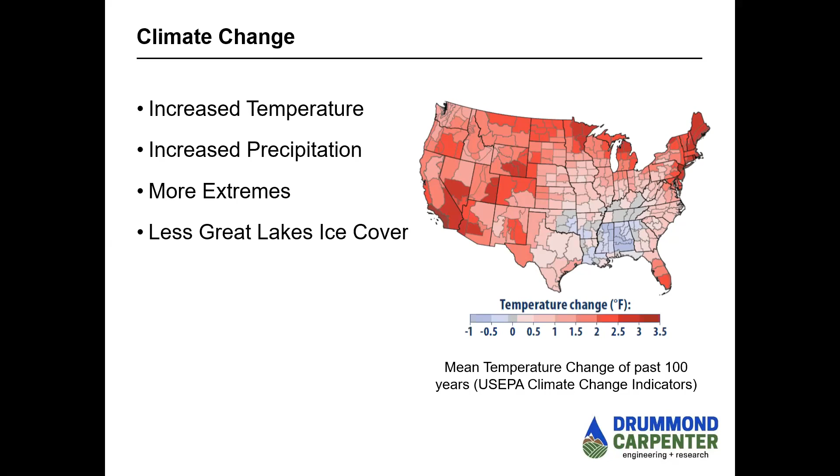We've definitely seen an increase in precipitation, and many of you experienced that - we'll get to that on the next slide. But in addition to the overall increase in temperature and precipitation, what's more important, or as important, are the extremes: longer periods of drought, longer, more extreme weather events. So it's not just the averages, it's the extremes that are affecting us. Overall, we're actually seeing less Great Lakes ice cover, and that has various influences on our microclimates in the state of Michigan.

So what about increased precipitation that's been observed? Basically, over the last 100 years we've seen the average annual precipitation go up about 16%, almost 5 inches. But this isn't distributed evenly - what's really happened is our falls have gotten quite a bit wetter. You're seeing a 24% increase in fall precipitation when you look at the 4 seasons. And remember we talked about more extremes - the 4 wettest days of the year have increased by 35%, a third greater. So our wet days are wetter than they used to be in the past 100 years.

So that's observed, that's statistics. But you also have people looking at predictions, different climate models, asking what's going to happen to precipitation in the future. If you look at mid-century, roughly around 2050, there are low carbon emission scenarios and high carbon emission scenarios - these are averages based on a whole bunch of different computer climatic models. Basically what they're saying is that by mid-century you're going to see about an additional 10% increase in rainfall in the next 20 years or so. By closer to the end of the century, it's going to be anywhere from 15 to 20%, depending upon emission models.

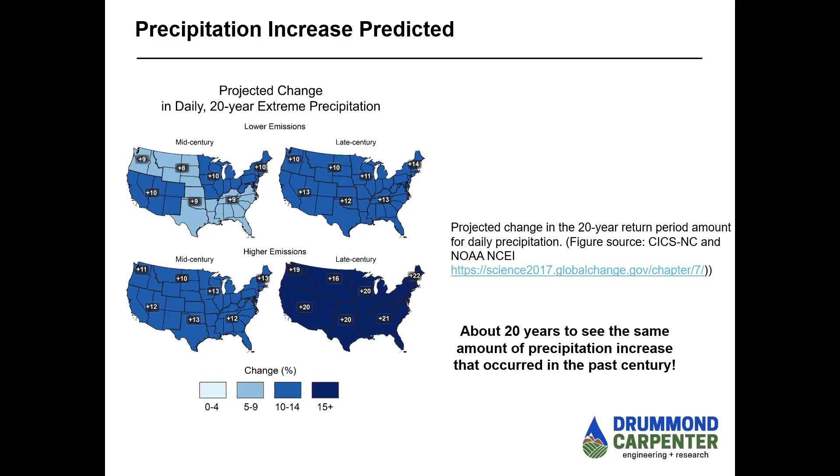What does that really mean? Basically, it means that in the next 20 years we're going to see the same amount of precipitation increase that we've seen in the last century. It took a century for the additional rainfall to get to us - now, in a matter of decades, we're going to see the same amount of increase. So we've got more water coming our way.

What about air pollution and human health? We have additional precipitation and higher temperatures. In the last couple of years, we've set records for consecutive 90-degree days. We don't have a lot of 110 and 115 degree days in Michigan like other places do, but we're cracking 90 with a lot more consistency than ever. Those high temperatures influence human health, especially for people without air conditioning or those in urban microclimates where even though the air temperature is 90, it might feel like 100 or 110.

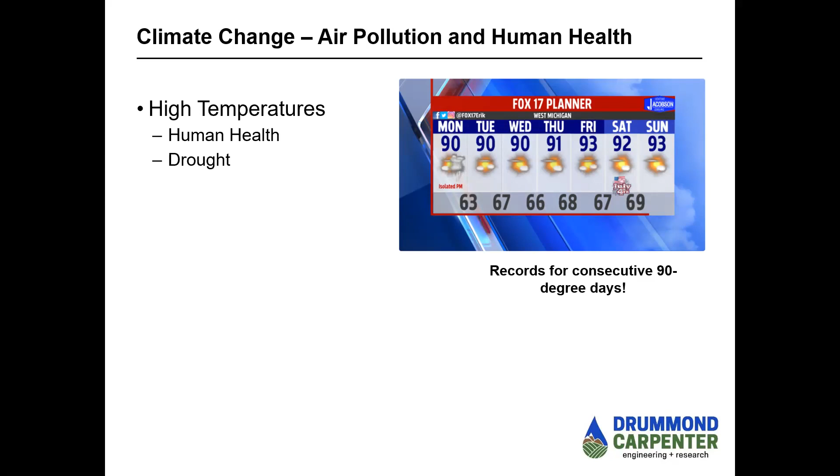We also have droughts, which influence our crops. In addition to the high temperatures, you actually see an increase in ozone, and people hear about ozone action days. They may not understand what that means, but basically when you have really high temperatures, you have additional ozone, and that ozone can cause human health issues from respiratory breathing.

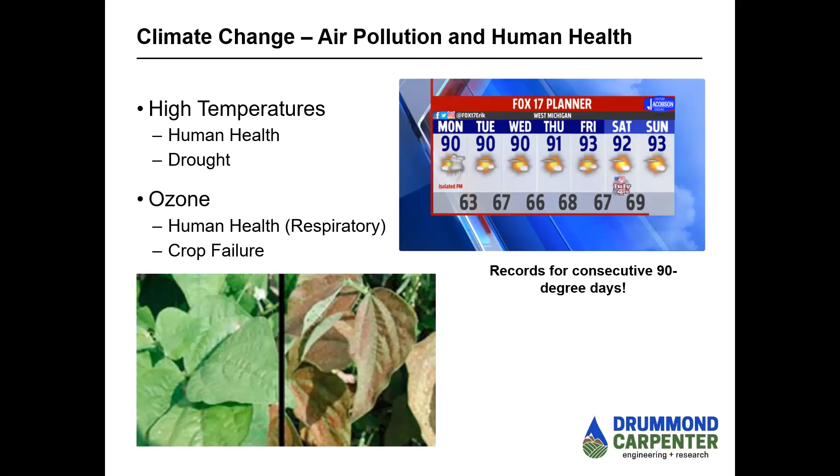So temperature has a role, ozone has a role, but in addition to that, you can actually have crop failure. Too much ozone influences the ability of plants to photosynthesize. The one on the left is a healthy plant, and the one on the right is basically the same crop after it's been exposed to high ozone action days. So it's not just the temperature, also the ozone that affects us.

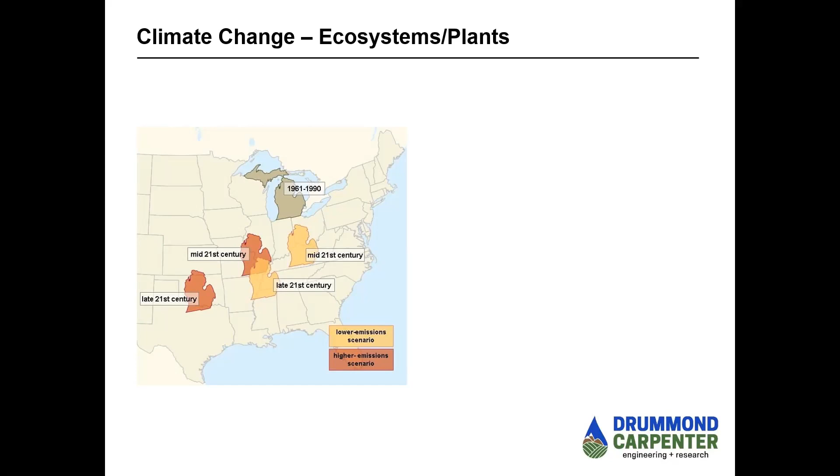In high emission scenarios with a lot of carbon, the models say we're really going to be more like Missouri and possibly even Oklahoma in the future. As somebody who grew up in Michigan in the 70s and traveled to Cincinnati, Ohio to visit relatives at the time, I can tell you that summers in Michigan and Detroit now feel like the summers of Cincinnati, Ohio did in the 1970s. So I can actually see where this image is helpful.

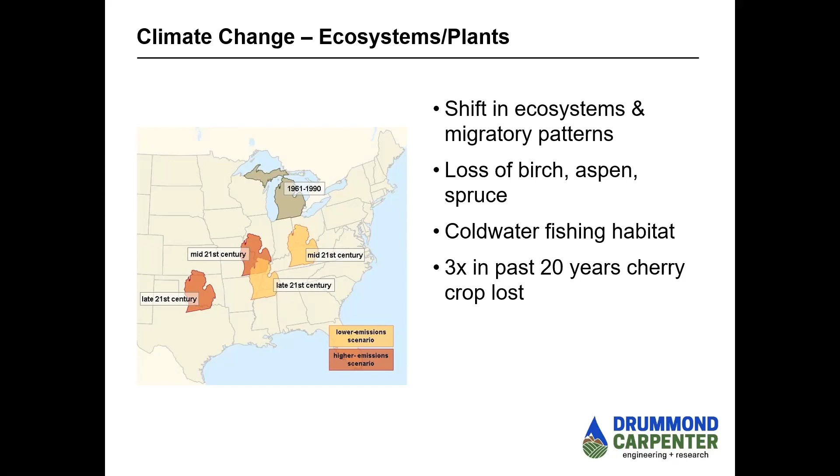So what does that cause? It's a shift in ecosystems and patterns. We're starting to see loss of birch, spruce, and aspen in a lot of our northern Michigan forests, affecting the cold water fishing habitat we have in the state. There's more to it than just this simplicity, but we've actually lost the cherry crop three times in the past 20 years, so it also affects our agriculture.

I've really kind of covered this, but basically when you think about climate change, you have all these economic impacts on top of that. It affects agriculture, causes more natural disasters, rising cooling costs. All of these things are packaged into climate change. So that was about an 8-minute introduction to climate change.

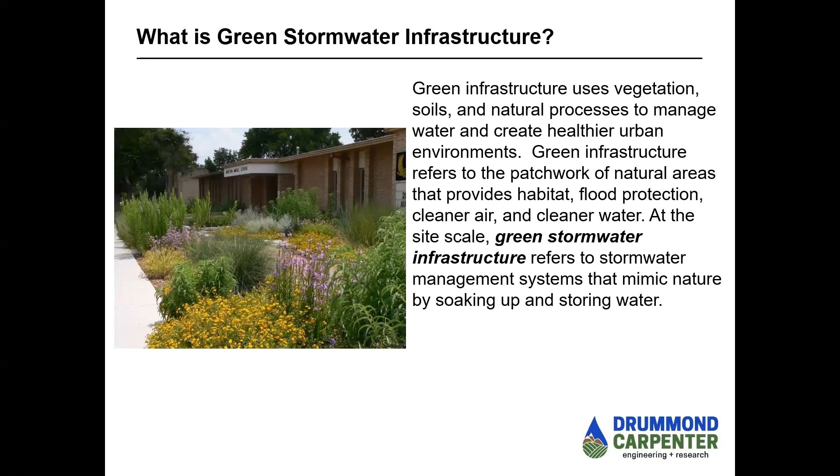Now let's do an even quicker introduction to green stormwater infrastructure. I think most of us have that part well in hand. In a nutshell, GSI is using natural systems to manage stormwater, a definition set up by the U.S. Environmental Protection Agency. There's a variety of GSI techniques available to us, everywhere from rain gardens, permeable pavement, and native landscaping. I'll give you a quick few pictures of each so we're all on the same page when we talk about GSI.

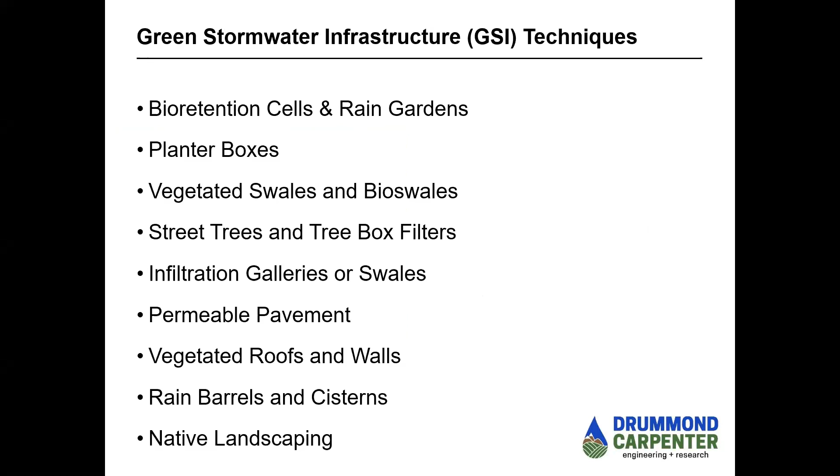Bioretention cells and rain gardens—a lot of people use these terms interchangeably, but really a rain garden is a small depressional feature. It tends to be a landscaping feature, a homeowner feature, something you can do site by site, lot by lot to capture and treat stormwater runoff.

A bioretention cell is a real engineered system. It's going to have overflows, curb cuts, and support gray infrastructure on top. A lot of the work I do would really be classified as bioretention cells. Planter boxes are familiar to all of us, but they can be integrated into a portion of a bioretention system as well, either above grade or below grade.

When you look at a bioretention stormwater planter, one key is you can have it open at the bottom so water can go straight into the ground, or it can be sealed off and basically act like a concrete tub or basin with plants in it, with an under drain so it can bleed out.

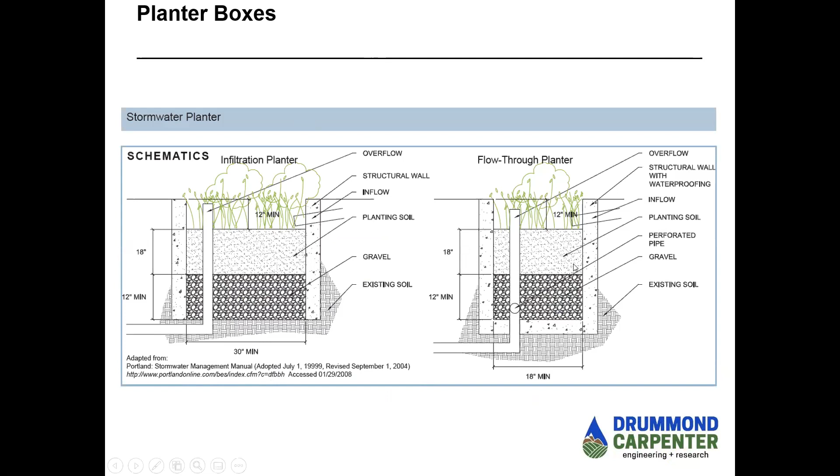Street trees and tree box filters. Street trees are a great way to combat climate change and intercept rainfall, but they're not the same as a tree box filter. A street tree only treats the water that falls on it and is intercepted by its canopy. A tree box filter is where water sheds off the surrounding landscape into a basin, and then the tree soaks that up. So street runoff goes into an engineered system, and the tree is the only part of that system you see, but there's a lot underneath.

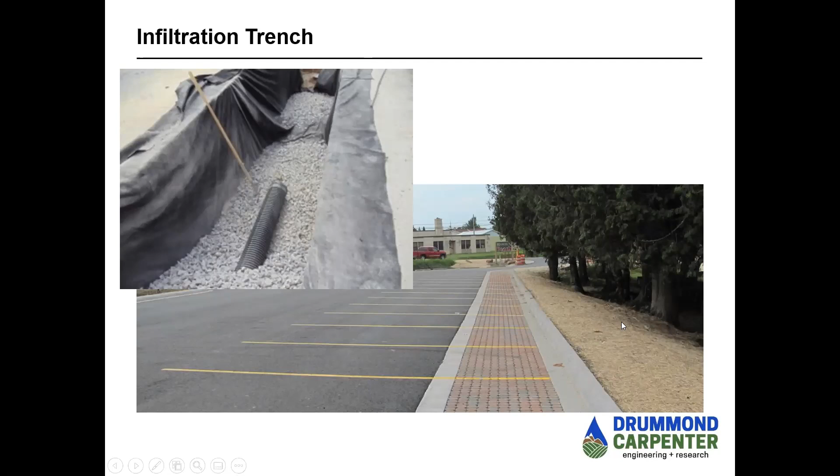Infiltration trenches and galleries: this is a situation where you have sheet flow going into a stone trench, which then infiltrates or exfiltrates into the area surrounding it. In this example from Traverse City, water sheet flows into porous pavement, into the stone, and can infiltrate into the ground to feed the cedar trees next to it. This can be expanded into very large systems, whole galleries of water stored underground that slowly bleed or leak into the surrounding area.

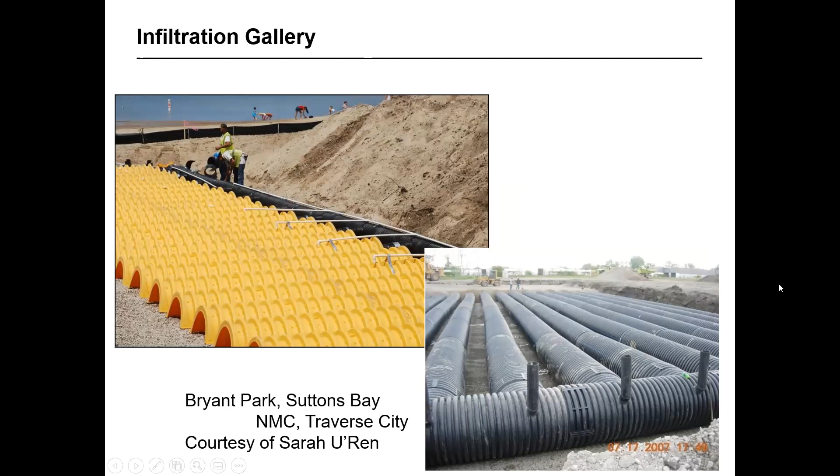Permeable pavements: we can have permeable asphalt, porous concrete, or concrete block pavers. These concrete block pavers can vary from having openings where grass can be planted so cars can park on top, to really decorative patios. But all of these have a similar situation where water flows through them into stone stored underneath.

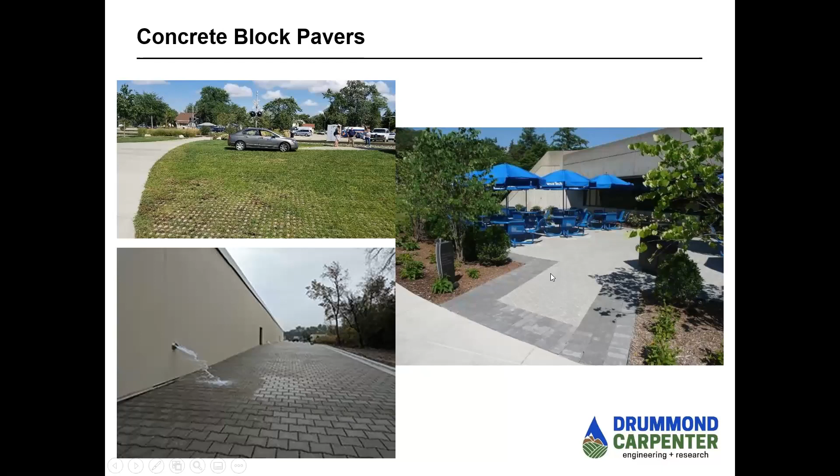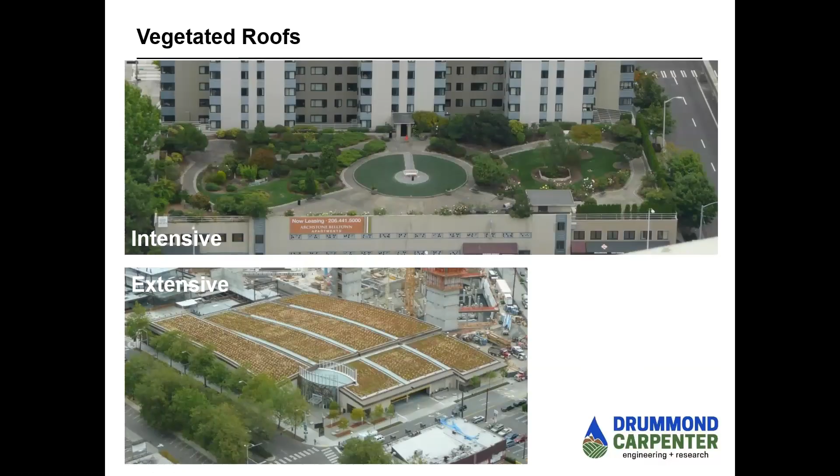Vegetated roofs and walls: you can have intensive, very large vegetated roofs, or extensive vegetated roofs, which aren't meant for human use but more for stormwater management as well as heating and cooling effects. I like to say vegetated roofs instead of green roofs, because a vegetated roof can have many different types of plants on it. It's not always green—it can be brown, orange, or very colorful.

We can take that concept and turn it on its side to have live walls. Live walls can be used for evaporative heating and cooling effects, and can be used in addition to planter boxes to capture and treat water. So it has a lot of similar properties to a vegetated roof, but behaves differently—it's mounted sideways and has a different design aesthetic.

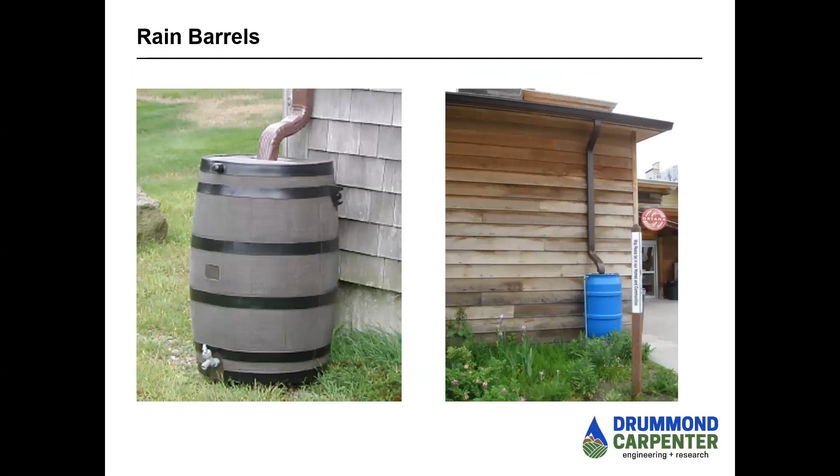Rain barrel cisterns and water harvesting: everywhere from a 55-gallon rain drum up to large-scale cisterns that can be used for irrigation or for internal plumbing and flushing toilets. And finally, native landscaping and buffers—taking turf grass and converting it to native landscapes. This can help with ecosystem benefits, pollinator benefits, water quality benefits, and even aesthetics.

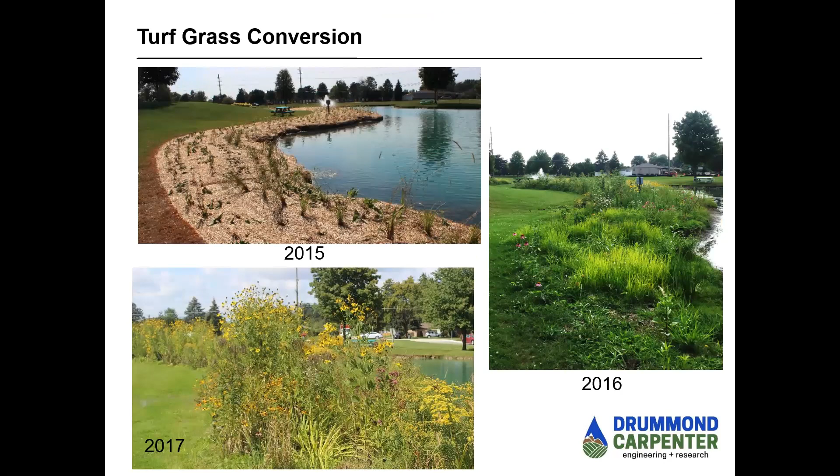I'm trying to track my time here—I know I'm going relatively quickly, but we have about 15 minutes left. Now I want to get into the heart of this conversation, which is resiliency. We talked briefly before about the things of concern with climate change: precipitation, pollution, human health, ecosystems. So when we think about resiliency, we're really talking about how to address those things using green stormwater infrastructure.

What we're looking at here is engineers will typically talk about a design event. They may say a 2-year event, or a 100-year event. You hear this on the radio or TV whenever there's a flood: it was a 500-year event.

The problem with using events is it's a bit of a misnomer. The idea isn't that this event will only occur once every 10 or 100 years. It's really a probability. A 10-year event really has a 10% probability of happening in a given year. So with probabilities, you could have two 10-year events in one year, or two 25-year events in back-to-back years, because it's all about probability.

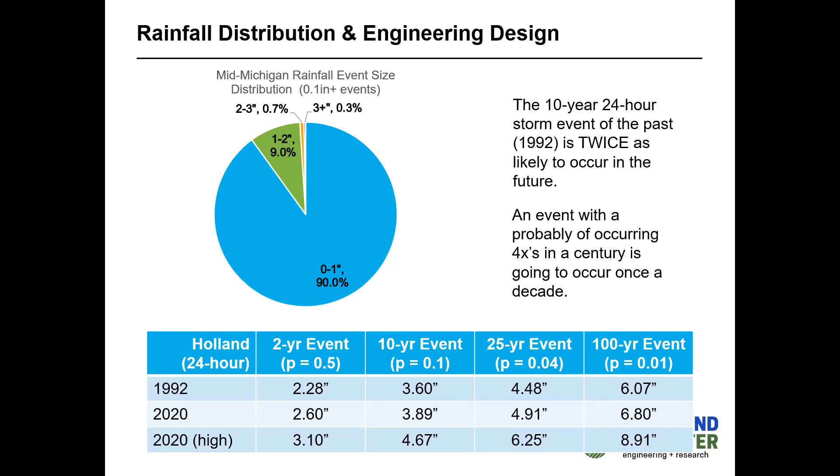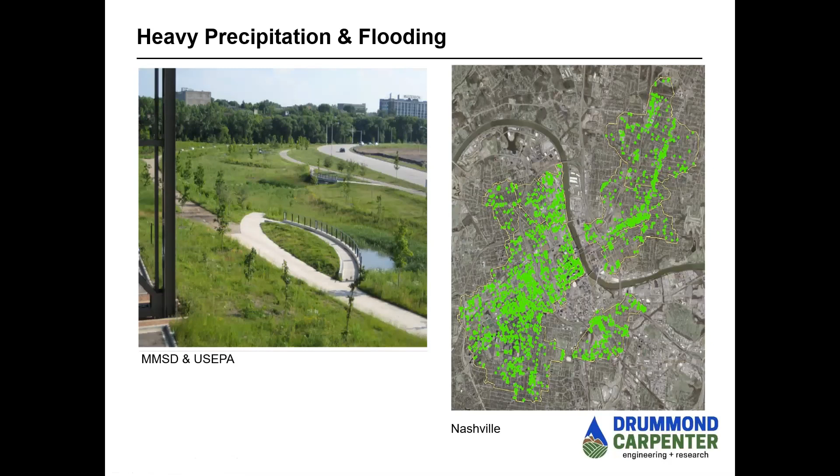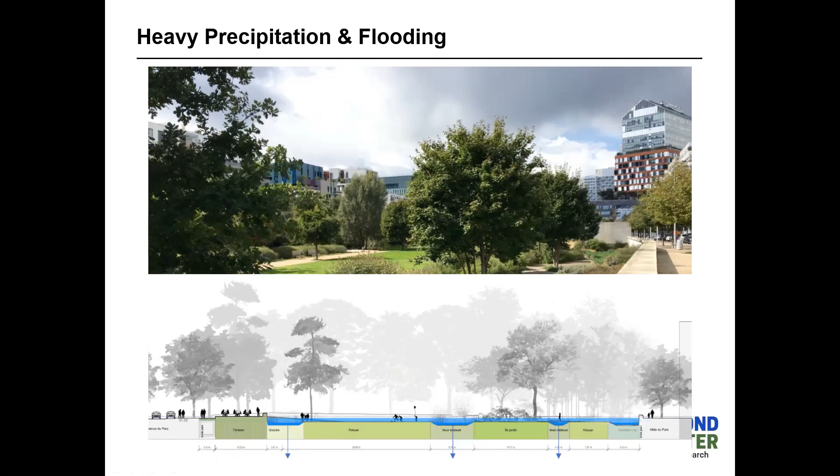So one of the things people talk a lot about with green stormwater infrastructure is the influence it has on water quality and on flooding. But another really important impact associated with it is air pollution and human health.

The vegetation, if you took one of those temperature guns that we're now getting very comfortable with because of COVID - a lot of people are getting their temperature taken when we enter buildings - the vegetation is cooler than the air. So having more vegetative canopy or more vegetation on the ground can really diminish that urban heat island effect.

In addition, it cuts down on the ozone. It purifies the air, it filters out particulate matter, it sequesters carbon dioxide. So not only are you cleaning and purifying the air, but you're reducing those temperatures, reducing the ozone, and having an extremely positive effect on human health - the more green space you can get inside of urban environments.

I don't really have time to go into all the details associated with the co-benefits of green stormwater infrastructure, but when you think about a resilient community, what you're really thinking about is a community where people want to live, work, and play - so economic resiliency is part of this. Green stormwater infrastructure can increase the appearance and aesthetics of a community, it can help with traffic calming, and it's been shown to be good for the economy. Eco-friendly development, energy savings associated with heating and cooling, increased land bases - so you can have ecotourism, you can even have cottage industries around green stormwater infrastructure maintenance. It's really been shown to be good for the economy as well, which makes for a more resilient community.

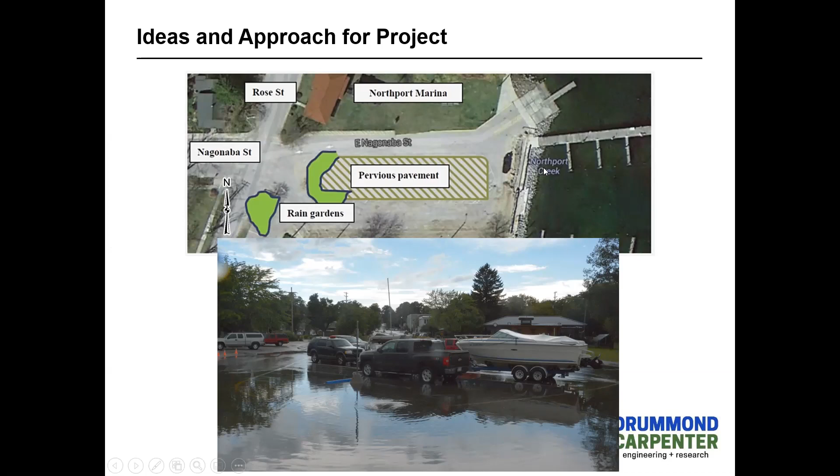Instead of the plans calling for some green infrastructure on Nagonaba Street and some in the marina, we pulled all of that up from the marina into the street itself. Google Earth aerial imagery actually captured us while we were doing construction.

So we did tree box filters on the main street. We basically narrowed the street itself, took asphalt out, and made larger pedestrian walkways. We put in a series of tree box filters connected with stone reservoirs. And then when we got to the place where the water table was high and was going to be a problem, we put in street trees.

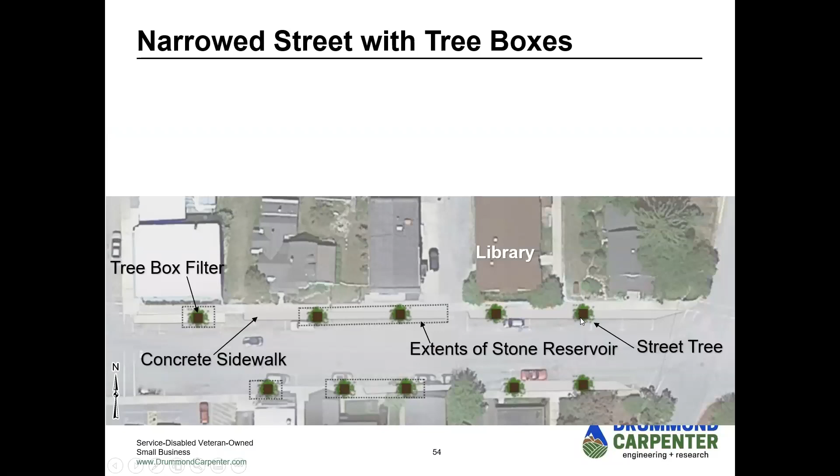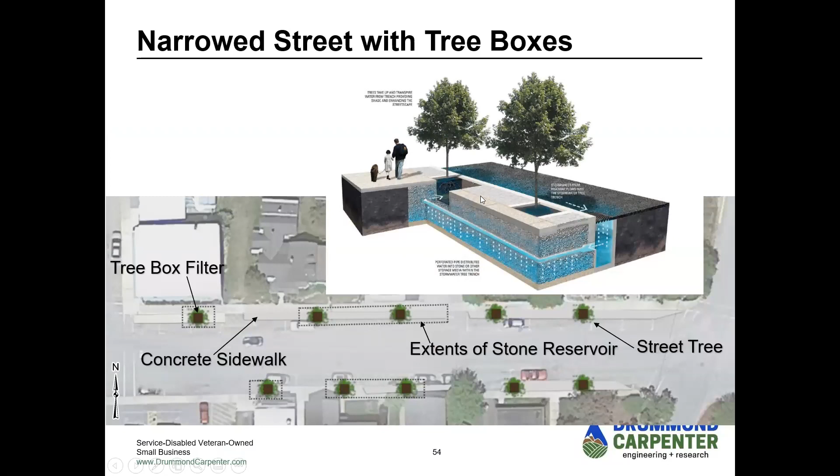So what this looks like, even though people walking don't see it, each of these trees is connected underneath with stone reservoirs allowing for infiltration. So people up here are walking around enjoying their ice cream, and there are infiltration galleries underneath all of them.

The community wanted something that looked like a really nice bioswale or rain garden, but with the rising lake levels, we thought it's probably going to behave more like native Michigan wetlands. So how do we go about facilitating community desires with high water tables and get this to work?

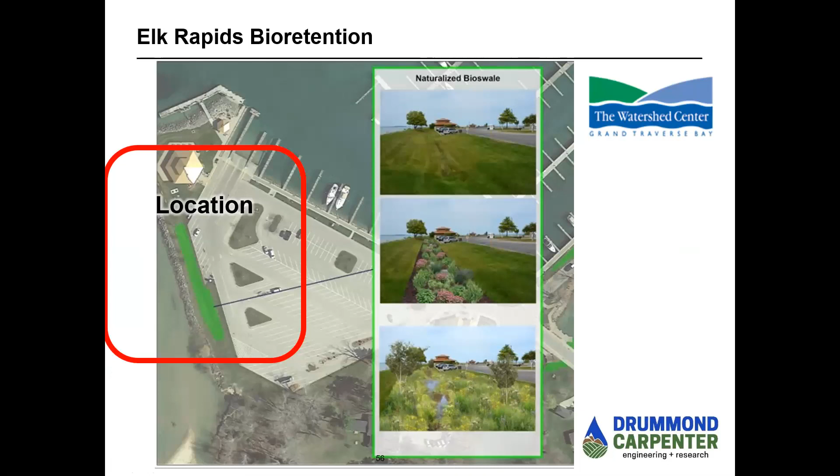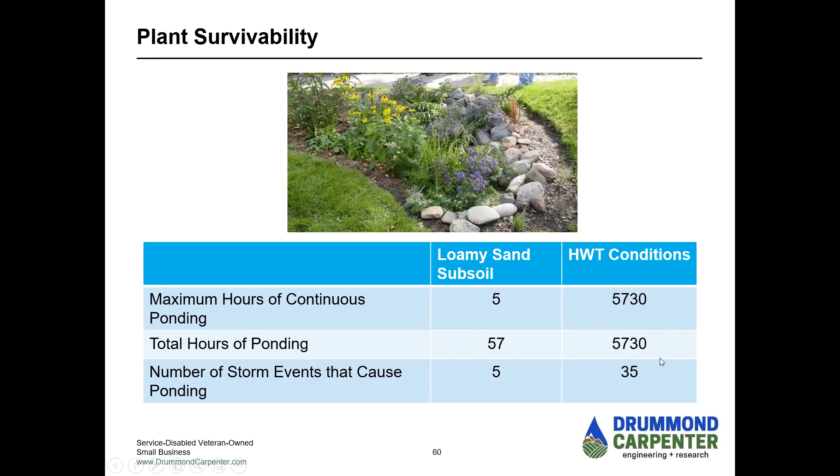But when you have this high water condition, all of a sudden 70% of the water is rolling off anyway, because it's got no place to go into the ground. Looking at this in more detail, we were worried about plant survivability. Under ideal conditions, you might have only had 60 hours of ponding a year. But we were seeing that the thing was going to flood the very first rainstorm and stay flooded the entire year. A 1-inch rainstorm would actually cause over 60 hours of flooding — beyond what the plants could survive.

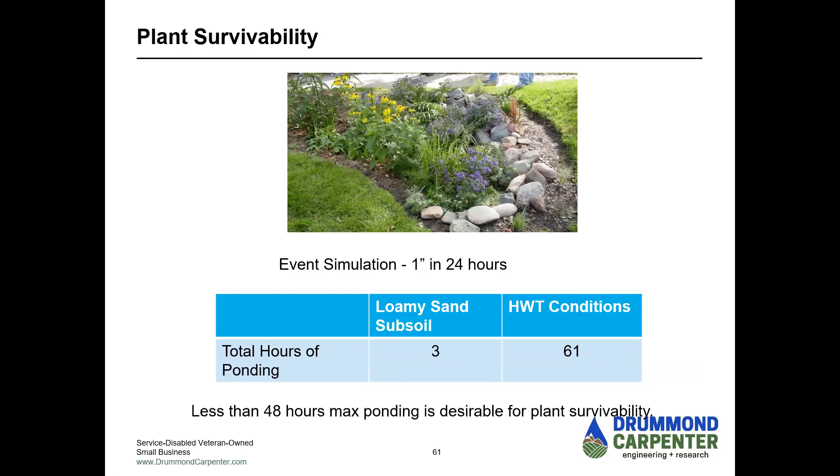So we needed to modify this. What we did is we said, okay, let's get rid of the underdrain. Let's have no ponding at all.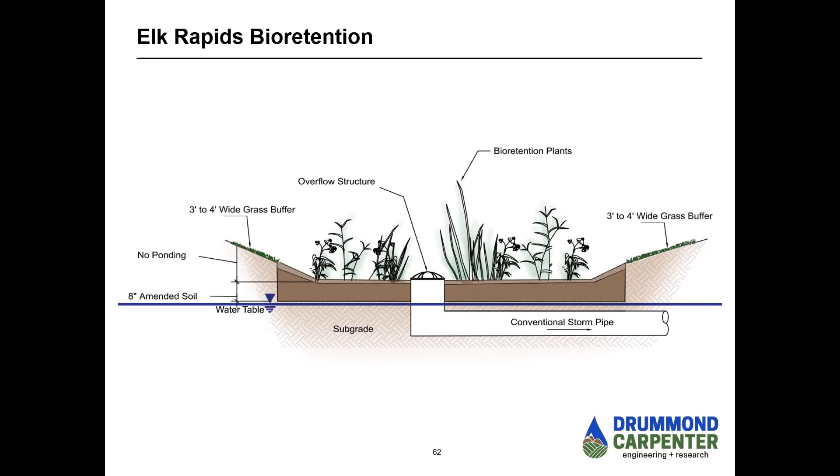And let's really treat this instead of like a bioretention cell. Let's treat it like that native Michigan wetland that's going to have plants that can adapt to being wet and dry seasonally. So we completely changed the cross section because of this high water table. It made it more resilient in the future.

I've only got a couple minutes left, so I'm going to go through these last few slides pretty quickly. But what we decided to look at is how do we make these designs more versatile? So we started doing two things.

We started doing one, an upturned elbow or a standpipe. So basically inside the catch basin, we connect the standpipe to an underdrain, and that'll set how much water is retained in the system, right?

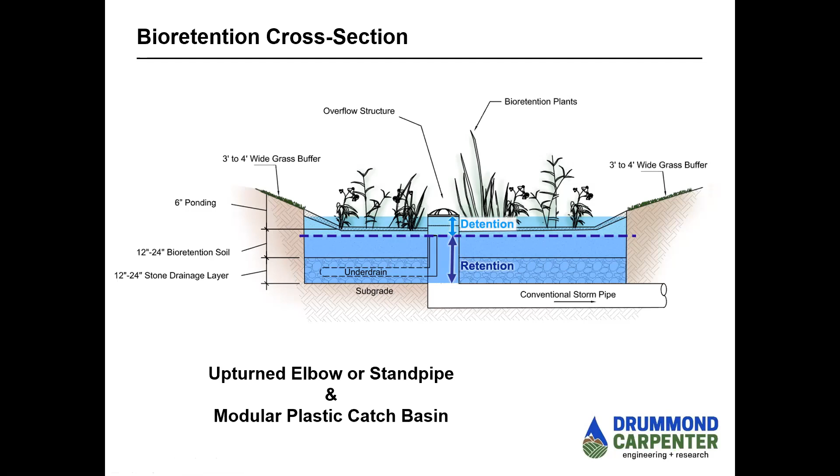And then we made the catch basin itself modular plastic, so you can basically add 6-inch lips to this overflow structure. So this may be your standard design: you've got no high water table, you've got really good infiltrating soils, so this water will be retained and it'll eventually infiltrate into the ground, and you got 6 inches of ponding. And if you find out that it's infiltrating more than you think, or if it's drier, you can actually add another 6-inch lip and have 12 inches of ponding instead.

If you have a water table and you're not getting as much retention or infiltration capacity as you want, then you can lower that upturned elbow and shrink the retention zone, making sure your plants aren't too wet for too long. If the water table gets really high, now you can eliminate the ponding and make sure the plants don't suffer from mortality based on being too wet too long.

So we're starting to basically adapt this GSI for changing events, and these are easy to modify. You don't have to rip out a concrete catch basin. Because they're plastic and because they're modular, you can easily modify this as time goes on.

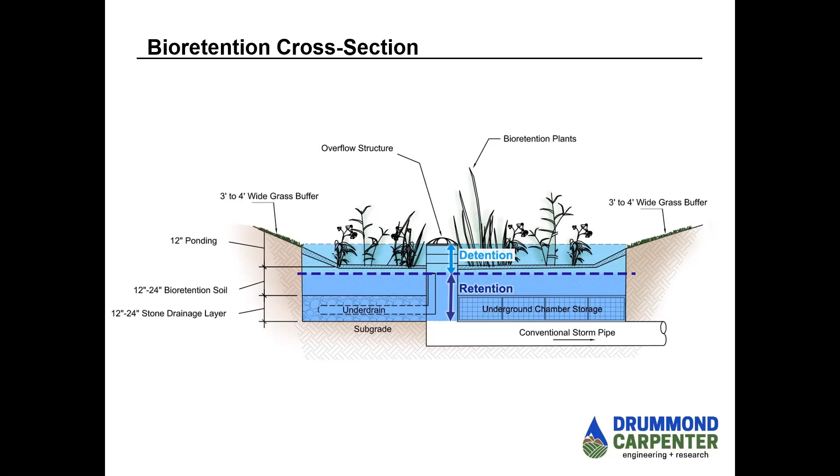In addition, we started looking at putting underground chambers in it. These could be like an R-tank system, basically a plastic system that allows for additional capacity storage, so just another way to add resiliency to these. And this also works with porous pavement, even though I spent a lot of time talking about bioretention. A similar concept would work with porous pavers, other than you don't want to have any ponding above the pavement.

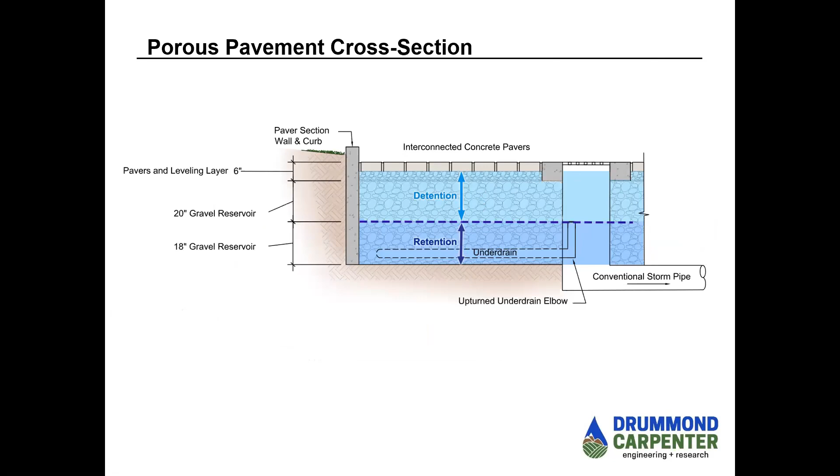So the last topic is plant selection. I am a hydrologist, I'm a professional engineer. I'm not an arborist, I'm not a landscape architect. But I will tell you a few things as an example.

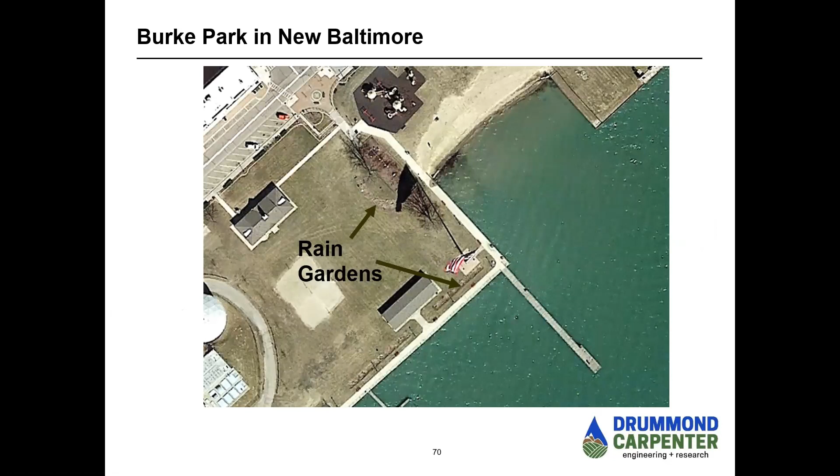There are some rain gardens that were done in Burke Park, New Baltimore. This is the 2015 picture. These are beautiful rain gardens, properly designed, properly constructed, proper selection of plants. Everything was beautiful. The issue was that between 2015 and 2019, Lake St. Clair came up like 5 feet, and that was not foreseen in 2015. So now these rain gardens have kind of gotten flooded over time.

And so now you basically have standing water in them, and you basically have invasive species coming in, and you have really just two plants. You lost a lot of the flowering plants. So to try to learn from this moving forward, what we're looking at is, okay, how do we pick... oh, there goes my timer. That tells me I'm at my time limit.

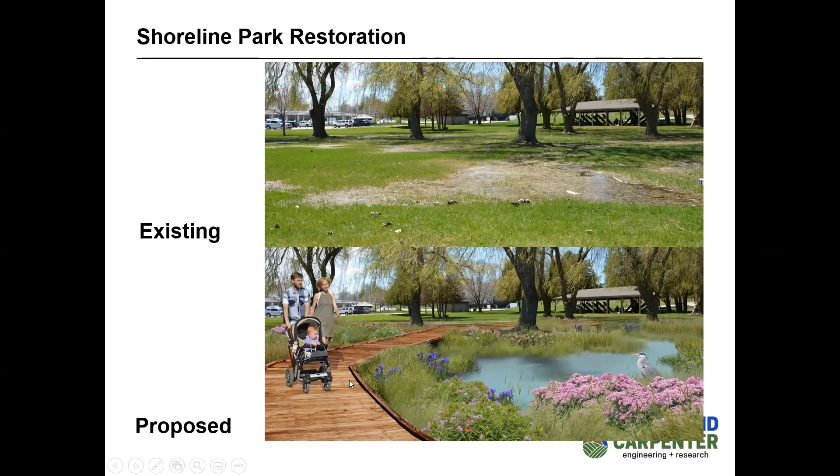So what we started looking at then is, how do we take areas that are wet shorelines, and instead of maybe doing traditional rain garden design, how about we put in projects in areas that are wet, and go ahead and devote them to being wet, putting in wetland species and native plant species that can handle very different hydro periods. And that'll help dry out other areas, so you're basically changing recreational uses of some of these shoreline parks. This is a project we're working on with the Tip of the Mitt Watershed up in Charlevoix.

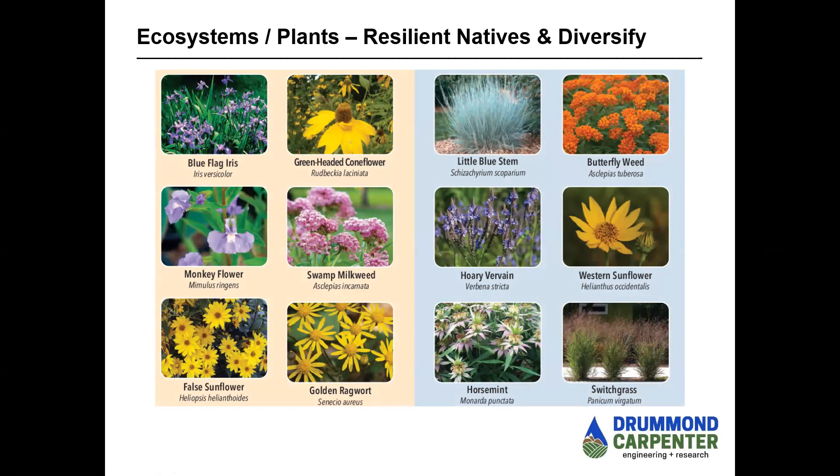And then also looking at different plants, right? So how do you use native plants that have a wide range of hydro periods, and looking at how that might work. And with that, I am at my time limit, and I think Rob is going to help us facilitate questions.

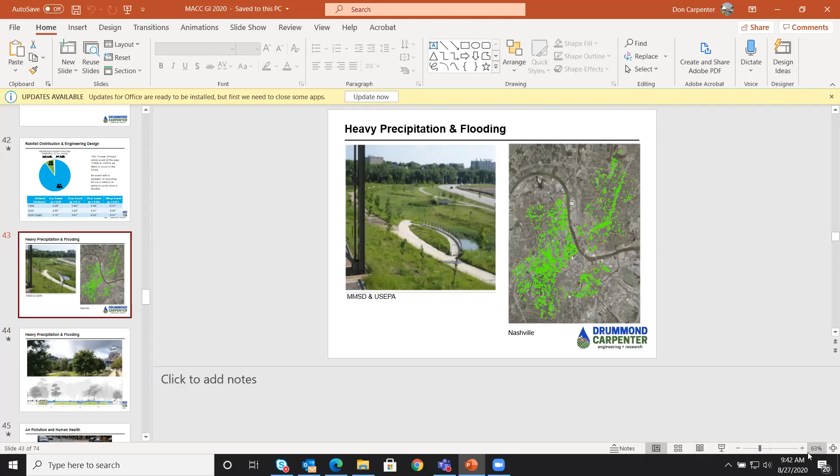Can I say something real quick? I believe I acknowledged everybody as I was going through, but just in case. Oh no, looks like people had a hard time hearing me. Yeah, initially we had a few, a little bit choppy at first. It did clear up after a while. Okay, well I'm sorry about that, hopefully it turned out okay on the recording.

I did want to thank the MACC for allowing me to participate in today's event and for being a real champion in green stormwater infrastructure design in West Michigan. As I said, some of the examples I showed were also with nonprofit organizations, the Watershed Center of Grand Traverse Bay, Tip of the Mitt Watershed up in northern Michigan, as well as the Clinton River Watershed Council. I want to acknowledge the hard work that nonprofits are putting in to make green stormwater infrastructure and community resiliency more of a feature in Michigan. Thank you to those organizations.

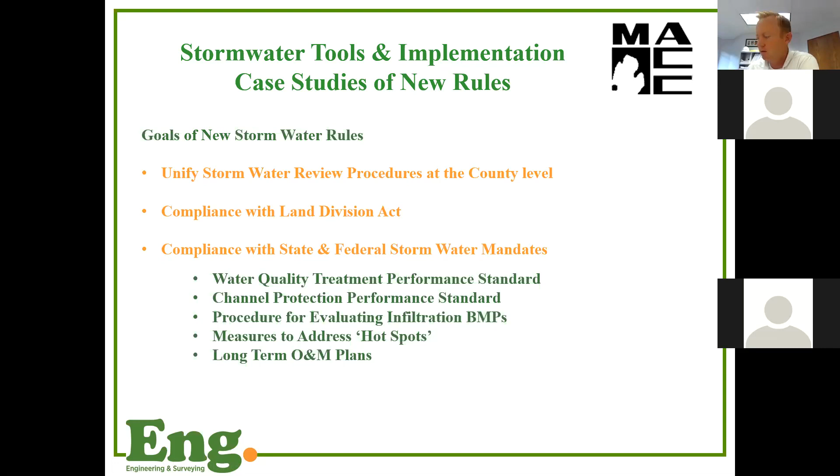So just an overview of the critical design elements with the rules. Soils investigation, I'm going to talk about quite a bit today because it's very important to stormwater design, especially on the west side where we have a lot of sand and we're capable of using infiltration techniques. It's very important that we have that soils investigation.

Water quality, first flush, which obviously contains the most pollutants. So we're trying to treat that water quality, and that's capture and treating runoff from the 90% annual storm, which is approximately 1 inch of rainfall.

The channel protection for surface water discharges. This doesn't apply to retention basins, but it does apply to detention basins. What we're trying to do is for the post-development runoff rate and volume, it shouldn't exceed the pre-development rate for volume and events up to the 2-year 24-hour event, which can be considered the bank full flood event. The smaller, more frequent storm events that we're having have the greatest impact on stream morphology and erosion in streams. So we're trying to protect those downstream systems that we're discharging to.

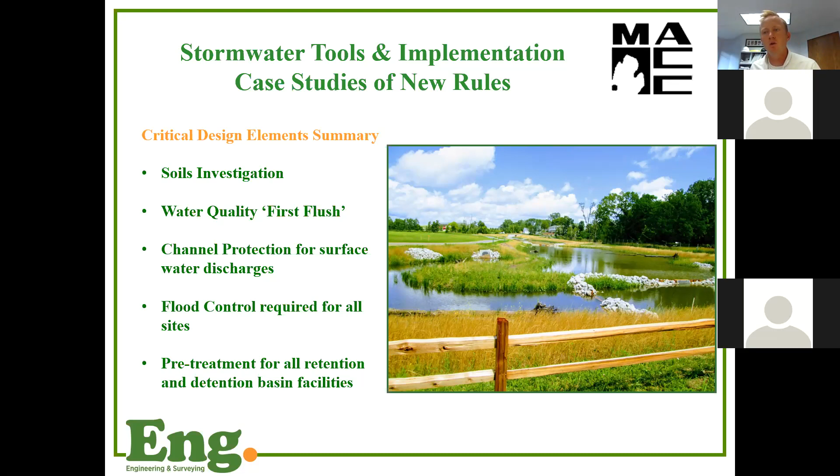So getting into some of the tools, we do have a stormwater calculator, and I know that Claire went through this in a lot of detail 2 years ago at this same conference and went through an example utilizing this spreadsheet, which is great. It's great for us as reviewers because we know how it works. It allows us to review things a lot quicker. This calculator applies to detention systems only. Obviously a retention system, we're not going to have a channel protection requirement because we're not discharging to a stream. So this is primarily focused on detention systems only.

And I think one of the things that I've noticed over these years doing the reviews is that it becomes obvious that a lot of the folks using this spreadsheet don't really understand the background, the actual calculation that goes with the spreadsheet. One of the things we're trying to work on with Claire is if there's a way that once people click on one of these cells, they can see the actual formula and calculation that's going into what's getting spit out, so that everybody's aware of what those calculations really mean. It's certainly easy to plug in your numbers and not think about it, and just take whatever it spits out. We want to get away from that so people understand everything that is entailed in that spreadsheet.

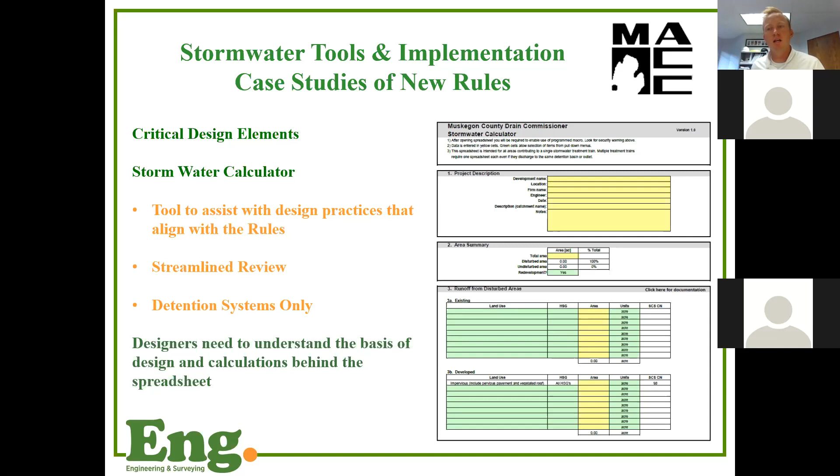So this is the soils investigation that is going to be required for all sites. And this was one of the things that we got pushback on early. Everybody wanted to default to the NRCS soil survey. They didn't want to spend the funds to go out and actually get geotechnical done, whether it's test pits or boring requirements.

All of this stuff is critical to how infiltration is going to work at your site. So the highest known groundwater elevation, which is basically, obviously doing the soil pits, it's a visual indicator. What we're looking for is the mottling line or the seasonal high groundwater level, where that's a visual line in the soil where we can see where there's been prolonged standing water, so that we can design our systems based on those elevations so that they're most likely to succeed.

Field permeability testing is a requirement. We're not going to allow material to be taken in the field and go back to a lab and have it done that way. Obviously, we want it done in the field. A double ring infiltrometer, I think, is kind of the standard to get that done. Nothing can replace a field test as opposed to a lab test.

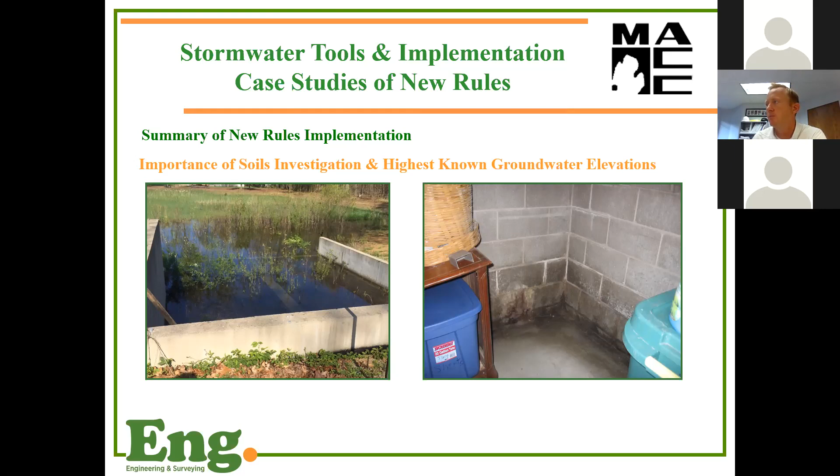And so what we're trying to do is mitigate all that right up front. Because ultimately what it does is it results in petitions to drain offices to come back and fix this stuff later at a much higher price tag. So that's why that soils investigation is so important.

So now I'm going to get into some of the case studies that we've found, I guess, going from an old school approach to a new school approach. Old school, let's build a large detention pond. Let's put in a conveyance system. Let's get it there as quickly as we can. And now we're trying to completely go away from that.

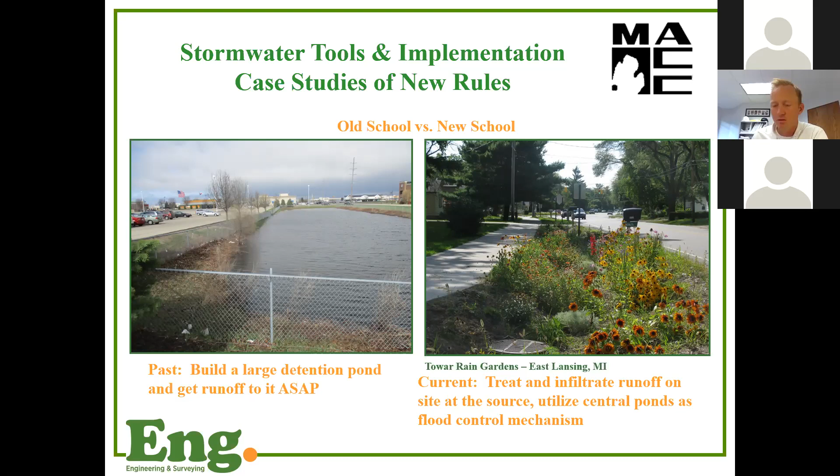It got implemented in East Lansing, kind of something that happened way ahead of its time. It wasn't as common as it is now, but completely retrofitted an older platted development to include all these rain gardens. We were able to utilize significantly smaller pipes to do that, and it turned out great. So it can be done.

So this is something that you'll see, this is the Lakes Mall actually, in Fruitport and Norton Shores. Again, kind of that old school approach. And what has happened over time is these systems, it's a high groundwater area for one. All of that discharge into these systems is carrying all that sediment and pollutants into these detention basins with it.

And the bottom of these has completely silted shut, no longer able to infiltrate through the bottom. All it can do now is infiltrate out of the sides. And it's not uncommon for these to sit at these high water levels for months before they're able to recede. And then lack of maintenance is another big thing that is a concern. But there's a lot of things that could have been done with these very simply to make these more lasting and function appropriately.

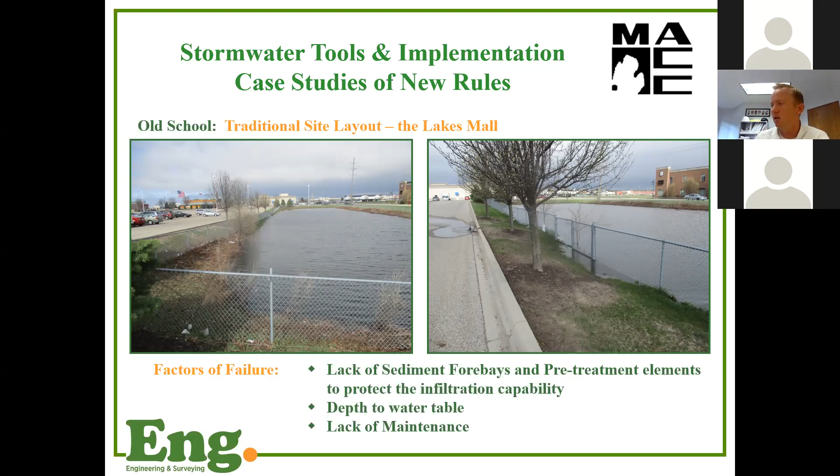So this is kind of the new school. This is what we're looking for under these new rules, where we can treat water quality right at the source in the parking lot - bioswales, curb cuts, perforated pipes set flat, leach basins - anything we can do to handle stormwater on site and not discharge it to a stream. Going from parking lot infiltration into maybe a regionalized detention basin or wetland construction to handle flood control as well.

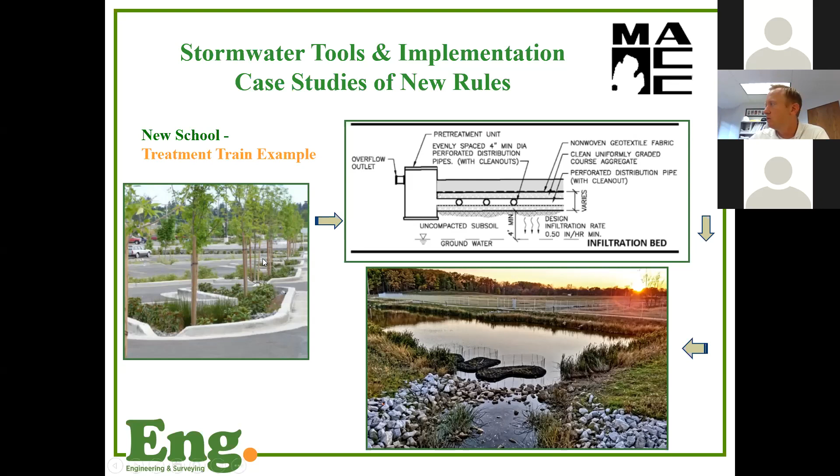This is kind of the gold standard for what we want to see, and honestly it's been a struggle to get these implemented. We know that in some cases developers just want to do the simplest thing possible, and it takes a little urging on our end as engineers to push these things as much as we can, because it's important to the long-term health of our streams and water courses.

So there are some limitations to retention basins, and I want to go through these because they're the things we got into the most conversations with designers about - it kind of threw them for a loop. If you look at the rational method calculation, this paragraph says this method assumes a conservative infiltration rate of 0.5 inches per hour, and that value is used regardless of soil type, based on the observation that retention basins fail most often due to the in situ soil being compromised and/or over compacted.

So people had a lot of problem with that. They thought, no, we've always been allowed to use half of our field tested permeability rates - why are we changing this? We can use half of the field tested permeability rates to meet our water quality and channel protection, but the actual flood control has limitations. There's been a lot of pushback on that. I think that's one of the things we've had to tell people - we can use those field tested rates for water quality and channel protection, but flood control has a different criteria.

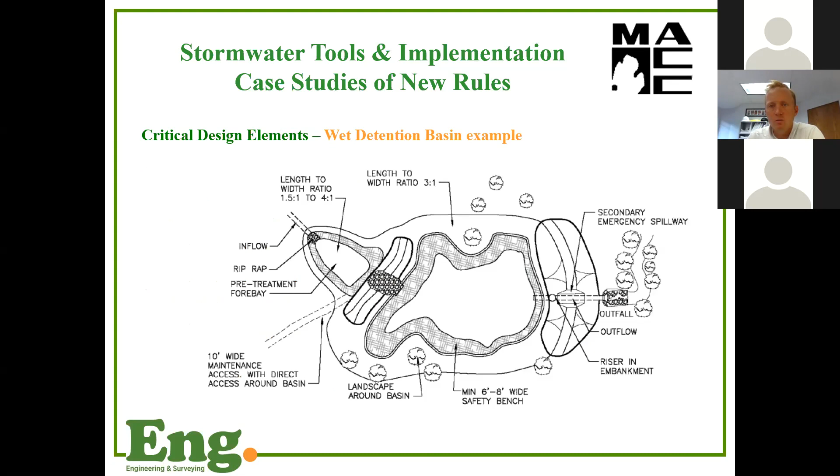Getting into a couple case studies, this is one that just occurred in Norton Shores. I'm going to skip ahead one, because if you look at that photo and then the photo of what we want the wet detention basin example to look like, it pretty much meets that to a T.

We want upstream infiltration measures taken, upstream BMPs, whether that's leach basins or perforated pipes or curb inlets with bioswales and things of that nature. We have our sediment forebay in place to filter out some of that sediment so we can focus our maintenance techniques in those areas.

This was a high groundwater table area, so there was the opportunity to utilize the side slopes for infiltration, being that we had sandy soils. This actually had an extended detention outlet - I'll talk about that more - but everything is focused on infiltration, which has to be the number one goal on any site. We want to infiltrate as much as possible.

And if it can't be met, then there's an alternative approach that needs to be requested, and the designer needs to provide justification for why they think an alternative approach needs to be taken. What we run into mostly is just groundwater - it's very high in some locations, so we have to go to an alternative approach, and maybe that's a multi-orifice design. That's the most common.

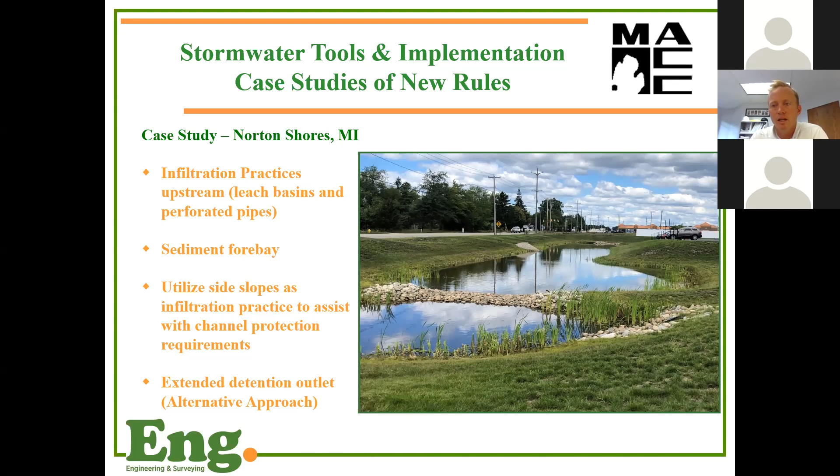So this is a case study in Fruitport, Michigan that maybe didn't go exactly how we wanted it to. We had many discussions with the designer about this project. Fruitport is known for high groundwater levels. They wanted to try to manipulate those groundwater levels by having various ponds.

And we had concerns very early on. We had several meetings. They did a very thorough soils investigation, but in this case, since they were going to be manipulating groundwater levels through these ponds, they also did a hydrogeological study as well, which I think was a good thing to do. But they wanted to try to utilize infiltration as much as they could, and we just didn't think it was going to be possible on this site.

And you see these ponds, there's forebay areas there, and you can actually see the overflow structure underwater in those. Those pre-treatment basins were supposed to infiltrate completely so that you could see the bottom. And after this was implemented, they were staying at those levels for months and months and months.

And what that ultimately ended up happening was now we're getting continuous discharge to a natural stream, which goes against our channel protection and everything else. So I guess this is one of those that didn't work out how the designer envisioned it to.

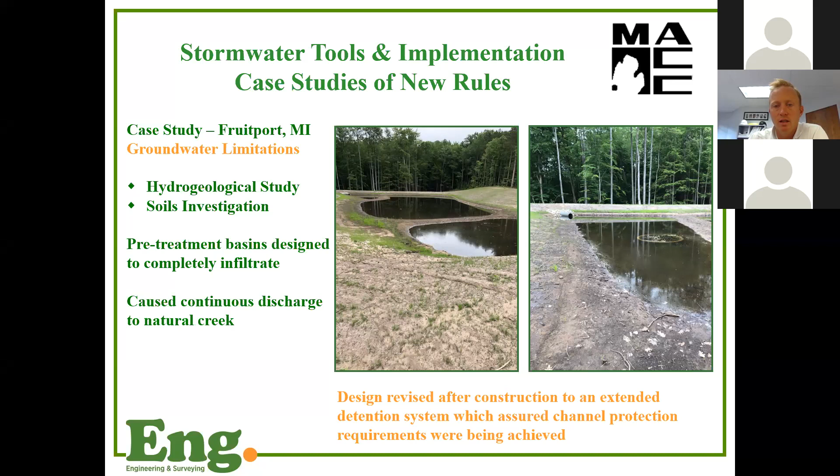And for channel protection, we want to completely store and infiltrate that difference in the post to pre-development 2-year 24-hour runoff event. So this is one that didn't go, I think, how they wanted to, but ultimately, I guess, at the end of the day, we got what needed to be done.

So this is another case study up in Montague, Michigan, a commercial development. The designer, well, first of all, let me back up. They did do a soils investigation, great soil, great sand, very good depth to the groundwater table. This is a golden site where we should be using infiltration 100%.

The initial submittal is they have a forebay, but they have a control structure, set their orifice at the bottom, just like the good old days, and they're sending stormwater off site. So we came back with our review letter, obviously, water quality, channel protection. There's no reason that we can't store and infiltrate that amount.

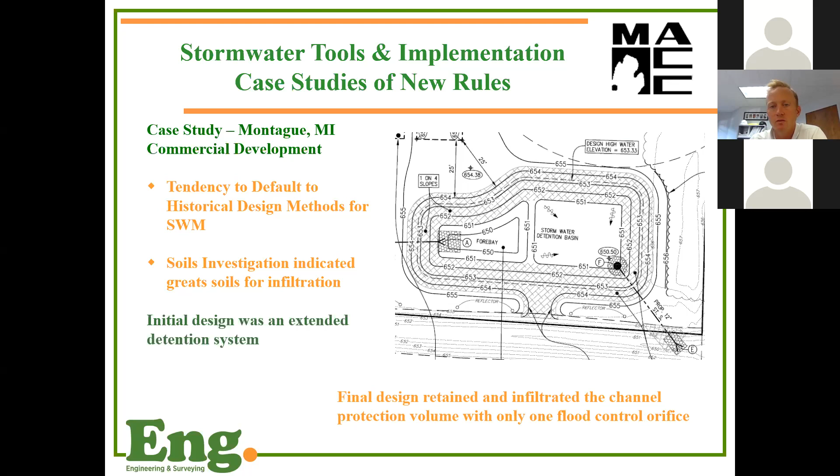So they went back to the drawing board, were able to make the corrections right away. But I think I just want to reiterate, because it's so important with these standards, that infiltration is what we're looking for as much as possible. So they modified that and we were able to meet the intent of the standards, but it took one more iteration for the designer that probably could have been avoided.

So I think this is my last slide. I'm a little bit ahead of schedule. And just an overview of the design elements. Again, soils investigation, make sure that we're doing that right up front. It has to be done. We're going to focus on infiltration as much as we can. We want to protect our streams as much as we can. So don't try to skirt by that, because that is something that we're going to look for 100%.

Do BMPs in the parking lots as much as possible. Use your imagination. There's a lot of tools out there. We list a lot of tools in the stormwater rules that can be used. So try to be creative. I know, breaking old habits can be tough, but that's what we're looking for as much as we can. Always focus on the infiltration, I guess, as your first design tool.

The other thing that we've noticed, or what we want to have happen, is do the best you can to protect the infiltration capability, especially so in retention systems, but even in detention systems as well. Anything we can do to protect that infiltration capability is going to be better long-term for the maintenance and function of our systems.

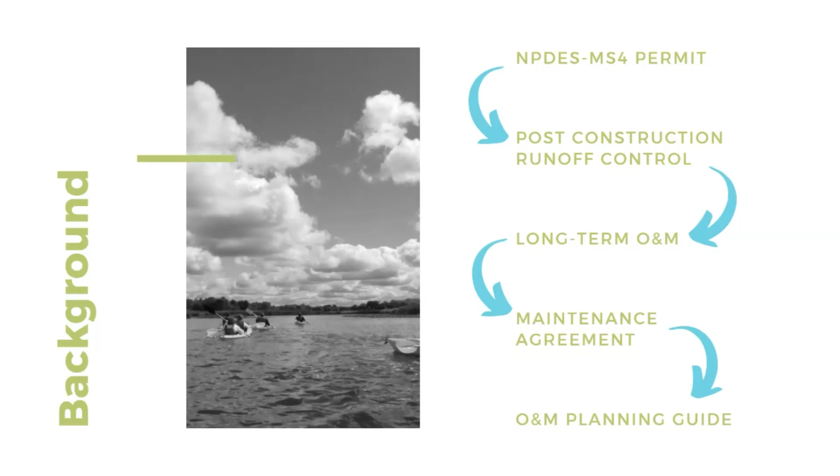And a maintenance agreement is only as good as the plan behind it. So we put together a planning guide to help that developer, engineer, whoever is designing a system or developing a property, put a plan together to go with their maintenance agreement that would be recorded with the local municipality.

So just some background on how we developed this, how it came about, and how we started to put the content together. Writing a plan, there are certain components that are fairly standard in all types of plans. We go over those components that should be in a plan, and we also provide some suggested language that can be used.

I work in a world where we do a lot of plans, so I'm used to that, but not everybody is. So we put together a template that hopefully is relatively easy to use and modify. It certainly doesn't have to be used, but we wanted to provide something.

Also within the guide, we refer back to the stormwater standards, the development rules that Ryan talked about. Within each county in West Michigan, within their rules, they provide a list of stormwater BMPs, both non-structural and structural. So our guide includes information about all of those.

There's a fact sheet for each practice that provides some basic information and an overview of the maintenance needs. We put those together as one-page fact sheets that could be taken out as a separate sheet and inserted into an O&M plan, so you have that basic information about that BMP.

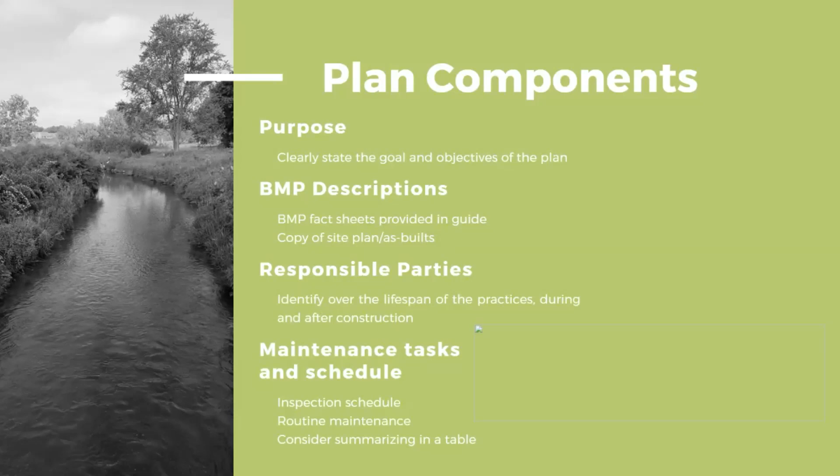So that may be something that you need to create within that Word document, as opposed to having something already in there that you just fill in the blanks. We're still kind of evolving this process a little bit and what that plan template might look like.

Beyond the actual maintenance scheduling, it's important to identify the waste handling procedures for both liquid and solid waste. Any of those maintenance spoils, how will those be handled?

A section about record keeping. Are you going to use the inspection forms we provide? What inspection forms are you going to use? Where are those going to be kept? Who receives copies of those? And then other types of record keeping too, for your routine and emergency maintenance records.

I think it's also important to talk about photo documentation, what photos you want to have on file for the practices. Do you want photos every time an inspection is done, or only before and after maintenance is completed? And then we do have a section that we encourage to be included about training.

Training the person or people that will be responsible for actually doing the inspections and maintenance. So we've got some basic training recommendations just for health and safety, depending on the practice. Is there personal protective equipment that should be used when going out to do an inspection?

Just depending on the BMP, if you're going to inspect a rain garden, maybe not. Maybe you just need gloves so you can pull weeds. But if it's more of an enclosed system, then maybe specialized training is needed, and not just anyone can go out and do that inspection.

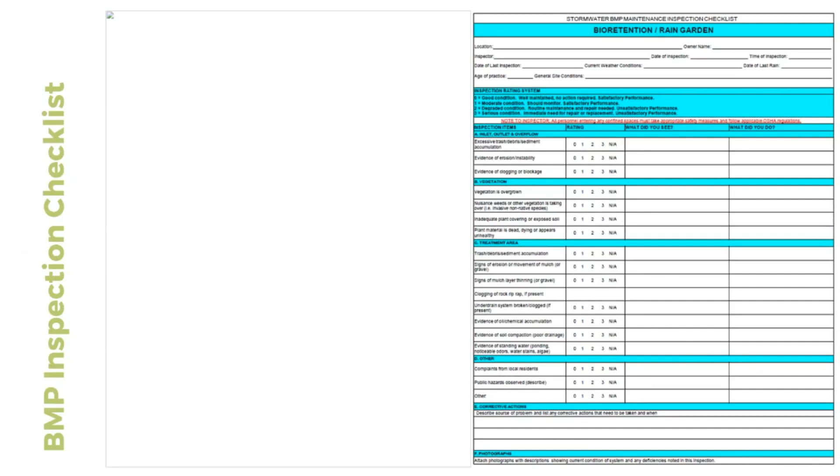Oh boy, okay, I see my graphics didn't load. So this was supposed to be a screenshot of the Word document. I think I'll have time, I can actually show you on the website where it's located and we can pull open that template.

Within the plan template, the first page provides instructions for how to use the template. Anywhere you see words in brackets, those are placeholders for you to insert information specific to your site. Anything in italics are suggestions or instructions, meant to be deleted, not left in your final plan. And then there's plain font where we've provided suggested language that you can leave as is, or modify if needed.

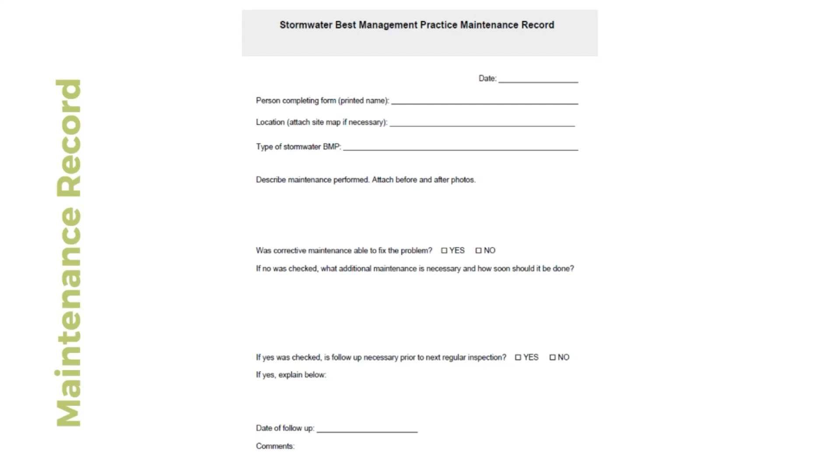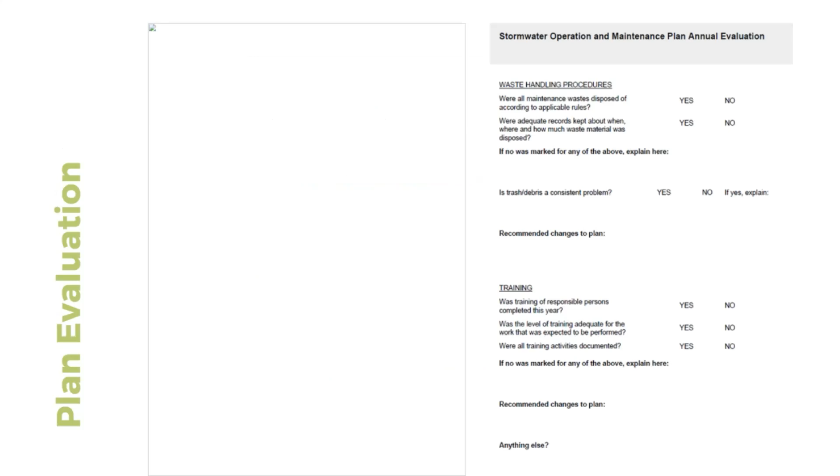All right, so since I have time, I'm going to go ahead and open this up on the website and show you. This is our main website. It's under the environmental program, and then stormwater operation and maintenance, and we'll provide this link in the follow-up emails. But this is the entire guide here. So if you just click on that, you'll open the guide. You see it's 111 pages in its entirety.

But then each of the inspection checklists we provided as independent downloadable PDFs. Each one of them is fillable. So if you choose to use these, you can just fill it out and save it. You don't have to print it and fill it out manually. It just depends on the comfort level of the inspector doing the work.

And then the other forms are here as fillable. So if you're recording maintenance or recording how you evaluate your plan. And then here is the plan template, it's a Word document, so it'll download. I don't think you're going to be able to see that because it's not in the screen sharing screen, but it's there for you to be able to download.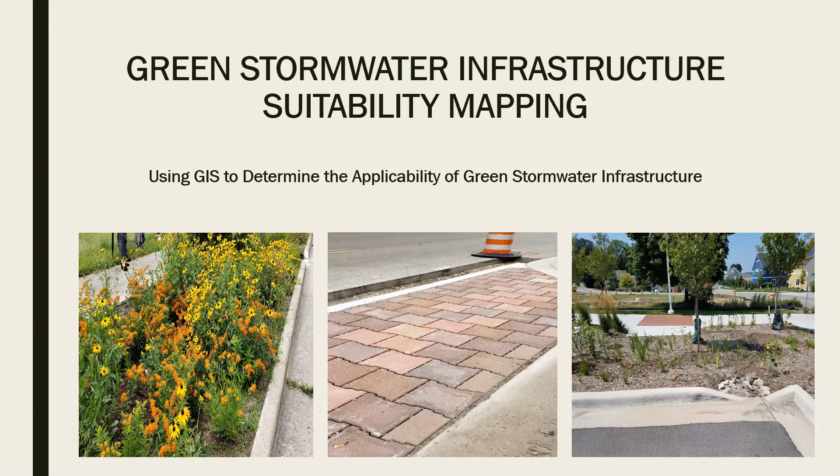So thank you for that introduction. Like Rob mentioned, my name is Mara Garricky, and I am the assistant planner at the Macatawa Area Coordinating Council. Today I will be giving you an overview of our green stormwater infrastructure suitability mapping process. This process and project was originally started back in 2017, before I began at the MACC. Since coming on board, I have been tasked with refining the GIS process and expanding it to reach a larger area. So I'm really excited to be presenting this today.

As a little bit of background, the MACC, with funding from the Community Foundation of the Holland/Zeeland area, developed a green stormwater vision for the Macatawa watershed in 2017. This vision includes information about types of green stormwater infrastructure, relationships between water quality and transportation, a brief discussion of economics, and a strategy to implement the vision. As a part of this vision, a GSI suitability GIS model for the watershed was developed.

In 2019, the GIS process was repeated to include all of Ottawa and Allegan counties. The Green Stormwater Vision document, as well as the maps for all of the cities and townships, can be found on the MACC website, and I'll be highlighting that later in my presentation.

The purpose of this model is to target GSI installation to specific parcels and to direct funding to the areas where it will have the greatest positive impact. We'd also like to provide these results to local planning commissions, developers, and engineers to use as an initial screening tool for the inclusion of GSI projects.

The first step in the process was determining which criteria would be used to indicate suitability for GSI. We first looked at a modified GIS model completed for Berlin, Maryland, and that link is at the bottom of this page. In particular, we wanted to look at practices that relate to infiltration, such as rain gardens. The study does not apply to practices like rain barrels and green roofs that don't require infiltration.

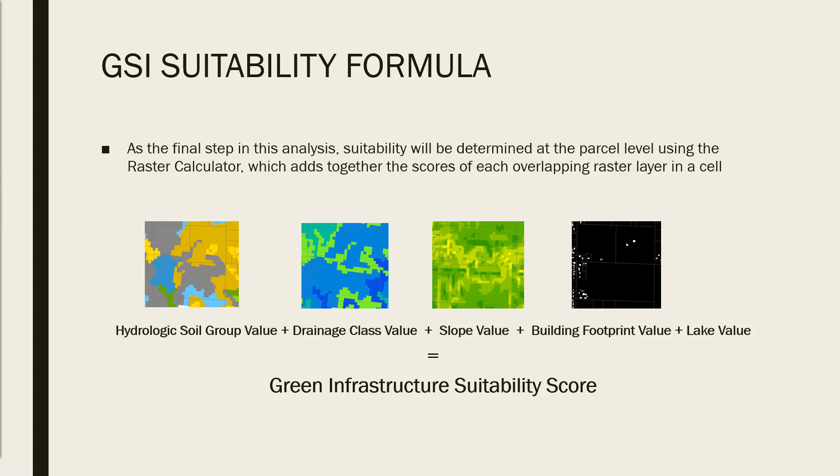The calculator will add together the score of each cell's hydrologic soil group value, drainage class value, slope value, building footprint value, and lake value to get the total GI suitability score for that cell, and then it can be averaged by parcel.

Before you get started, there are a few requirements you must have on your computer. You must have ArcGIS Desktop 10.6.1 or higher installed, and you also must have the Spatial Analyst extension. It's also recommended that if you have access, you use your ArcGIS Online account, because that'll be used to download a couple of shapefiles that are already ready to be put into the model.

When you are acquiring your data, you're going to need an area of interest boundary, which will come as a shapefile, and that can be anything you want it to be—a watershed, a city, a county, etc. For the rest of this presentation, we'll be focusing on Ottawa County, Michigan.

Next, you will download a hydrologic soil group and drainage class raster file from ArcGIS Online. It's important to note these are also available on the Web Soil Survey website, but that data must be heavily edited and manipulated to work in ArcGIS. In the instructional guide on our website, which highlights every detail of this process, there is some instruction on downloading that information, but I'm not going to cover that today.

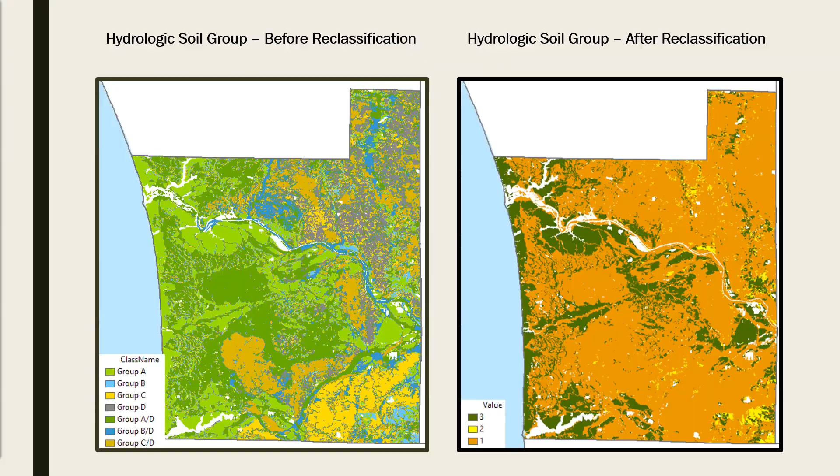The next step is preparing the natural drainage class layer, and it's done exactly like the soil hydrologic group layer. You'll download that from ArcGIS Online; the file is called USA Soils Drainage Class, and I believe it is a file from Esri.

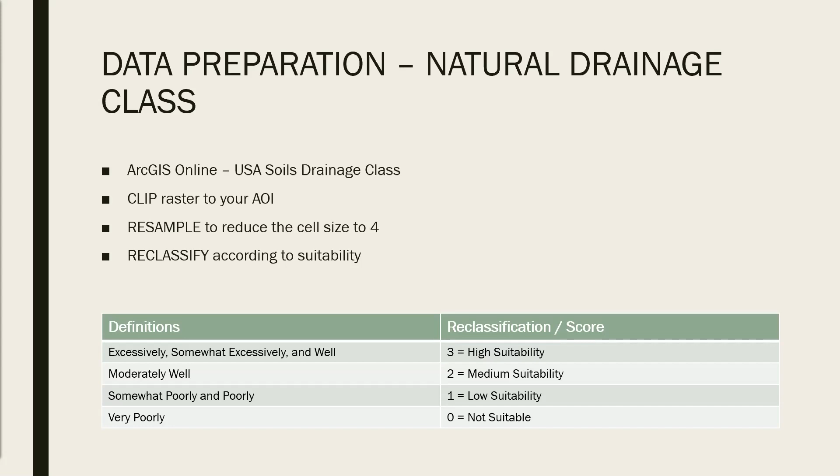Moving on to slope, you might already have a slope raster file in hand, in which case this step would not apply to you. You could completely bypass this and just use your slope layer in the final raster calculator. But in our case, we had LiDAR data from a bunch of different townships in Ottawa County.

So it was split up by township. If you also have LiDAR data that's split up and you need to combine it, you're going to convert all layers to a 4-foot resolution using the resample tool, like was done in the previous steps. Then you will combine all of those layers using the Mosaic to New Raster tool, which will give you a nice, simple LiDAR dataset with all of your layers combined.

You will then clip it to the new AOI and use the slope tool on the output/clipped raster to get the slope. The slope tool identifies the steepness at each cell of a raster surface: the lower the slope value, the flatter the terrain, and the higher the slope value, the steeper the terrain. You'll then reclassify slope according to suitability, like mentioned before.

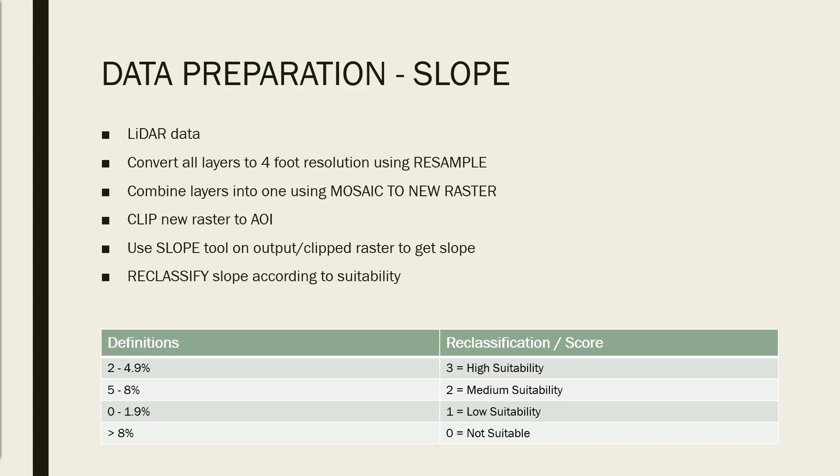The process for excluding lakes and buildings is basically the same, so I'm going to cover these two steps together. There are alternative methods to this process, found in the instructional guide, but I'm going to go with the one I most commonly use. Excluding lakes and buildings from any parcels they may be present on is important to avoid skewing the final score, since GSI cannot occur in water or on buildings.

To do this, you must use the union tool to combine the lake and building footprint shapefile with your AOI shapefile. Once that's complete, you'll open the attribute table, select the line containing the AOI, and export it as a shapefile. This creates a new shapefile with the shape of your AOI, and the areas where lakes or buildings are present will no longer be there. It'll be kind of like a cookie cutter—they'll be completely removed from the layer, so in those areas there will be no data, and therefore it doesn't affect the raster calculator.

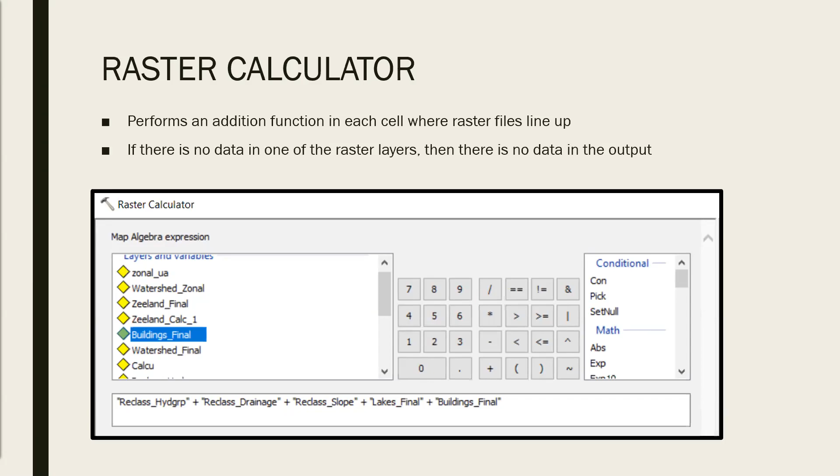The very last step of this process is using zonal statistics to determine the average suitability score per parcel. As of now, the suitability is by cell, so we want to take a parcel and calculate the average suitability within that parcel to get a much cleaner image and more useful data. The zonal statistics tool calculates the average of all rasters within a parcel, and then you'll reclassify it, as everything had been reclassified in previous steps, to get a final map.

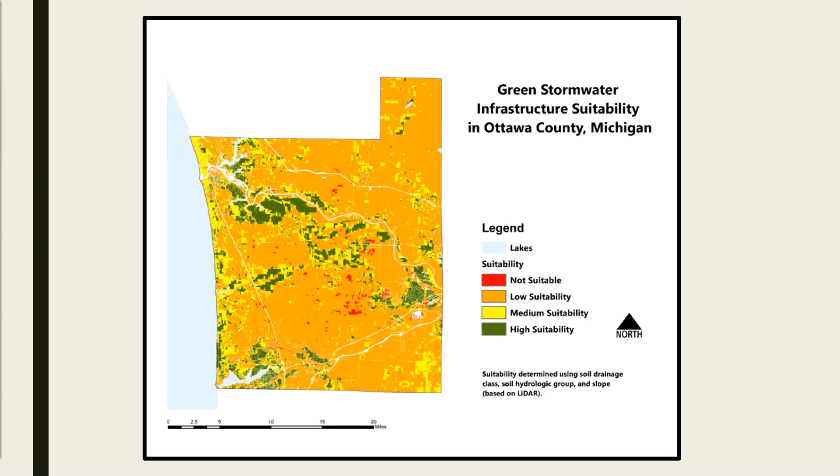This is a map of green stormwater infrastructure suitability in Ottawa County, Michigan. This is a clip a little closer up that gives you a better idea of what these scores look like within individual parcels.

The MACC, when originally working on this project, in the end, made this an optional step. You can take all of this information and prioritize what kind of parcels you really want to look at and target for GSI suitability. This was done separately from the suitability analysis, and it's really up to the organization completing this task to decide what kind of areas they'd like to target—maybe government buildings, schools, churches, or a subwatershed. That's optional, and up to the user.

For some additional information, all of this is on our website, where you'll be able to find the Green Stormwater Infrastructure Suitability Analysis Instructional Guide. This guide is basically a step-by-step instruction manual on how to complete this process, so it's great if you're interested in working on this yourself for a different region. It also includes the Green Stormwater Vision and PDF maps of all Allegan and Ottawa County cities and townships, so if you are from the area, you can find your map on our website.